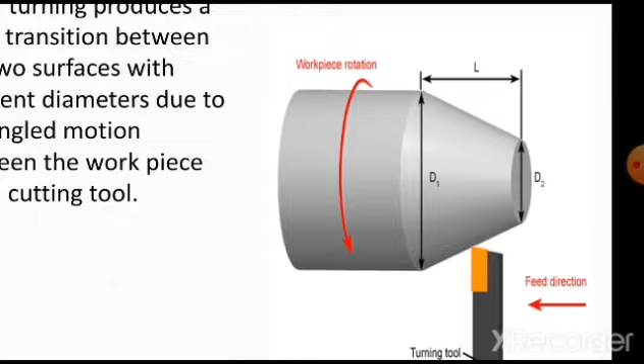So as you are going to see on the screen, let me enlarge it. What is taper turning? First we need to understand it is a part of the turning method only. That means in case of taper turning, we are going to reduce the diameter from larger to smaller, but only to a certain length. That is why it is called a taper.

We are not reducing the entire length. So to clarify here, we have considered a certain length, and we require to consider the diameter d1, the original diameter of the workpiece, and the final diameter of the workpiece. As you can see, the workpiece is rotated and we require to produce a taper, which you are going to see clearly on the screen.

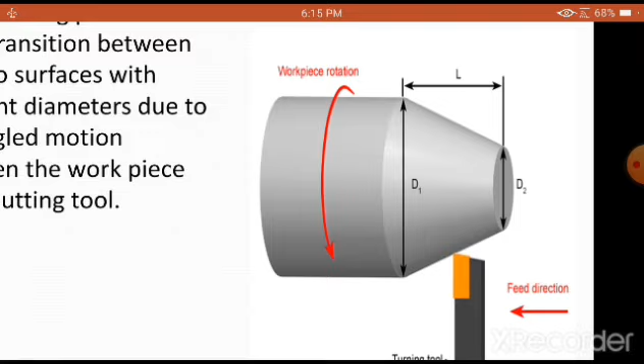So initially it will be like this figure. I require to remove the excess material that is to be removed. This particular method, where we reduce the diameter from larger to smaller either at the end of the workpiece or in the middle of the workpiece, depends on the case. Such an operation we call taper turning.

The feeding of the tool is either done at a calculated angle, or you can have a straight feeding, depending upon the type of turning method which we are discussing one by one.

Taper turning produces a ramp transition. This is called a ramp transition between the two surfaces with different diameters, due to the angled motion between the workpiece and the cutting tool.

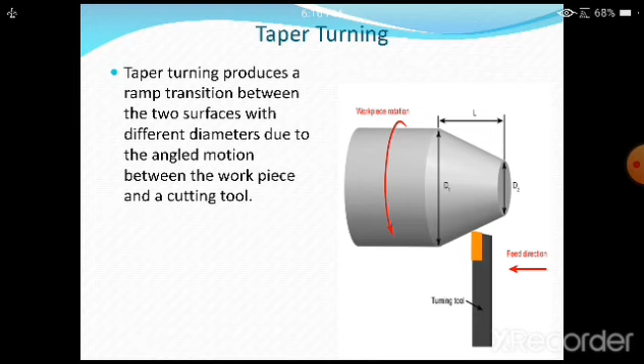As I mentioned, we require to move the cutting tool at a certain angle, or sometimes straight parallel to the axis of the workpiece, depending upon the type of turning method we are going to adopt on a lathe machine. So let us understand tapers and taper turning in detail.

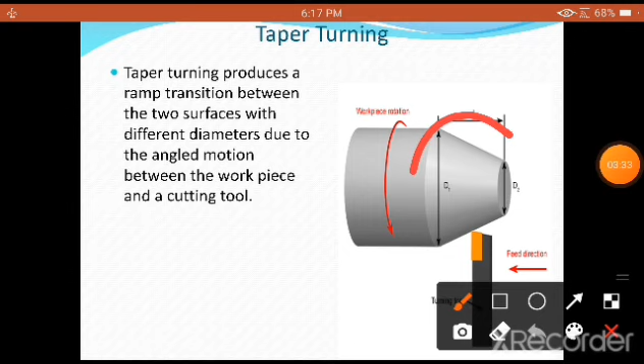In detail, the same taper turning we are going to consider in the form of a taper, as you can observe clearly here. Here you can see this is the original diameter of the workpiece, and this is the final diameter of the workpiece. D1 is the initial diameter, D2 is the final diameter after removing a certain amount of material.

Now here you see the certain taper angle. This is the calculation for the taper angle. We know what is tan of something - opposite side upon adjacent side, that is called the tan of a certain angle, as you already studied with sine theta, cos theta, and tan theta.

Using that formula, this is calculated and written directly here. First I have to calculate d1 minus d2, then divide by 2. So d1 minus d2 divided by 2 - after dividing, I get this portion, d1 minus d2 divided by 2. I wanted to clarify this here.

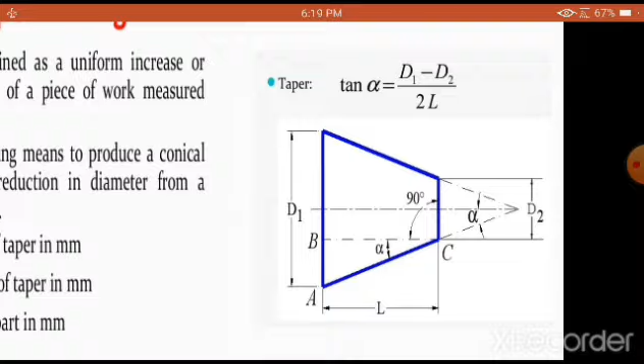Now you need to understand how this taper angle alpha is calculated, because this value is required even in your machine shop when you want to produce a tapered surface on a given workpiece.

A taper may be defined as a uniform increase or decrease in diameter of a workpiece measured along the length. Our measurement is along the length, so as I go either this way or that way, there will be a difference in the diameters. That is why it is called an increase or decrease in diameter, and the surface generated is called a tapered surface.

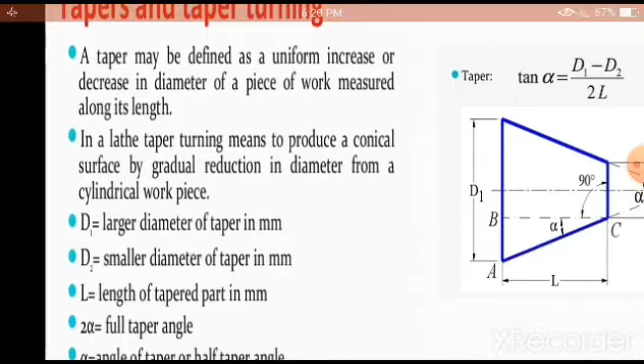In a lathe, taper turning means to produce a conical surface by gradual reduction in diameter from a cylindrical workpiece. That is why we have considered the diameter of the taper d1 as the larger one and d2 as the smaller one.

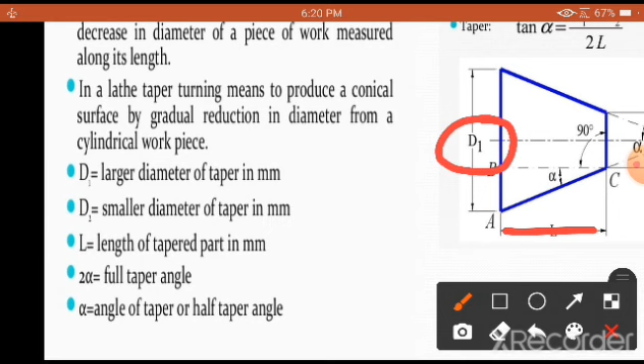Then the length of the taper is also mentioned here, how much length we require to give a tapering operation on a workpiece. 2 alpha is called the full taper angle, and alpha is called the angle of taper, sometimes the half taper angle. So this angle is alpha, this also alpha, this is also alpha, all together it is called 2 alpha, remember.

So that is called the entire taper angle, but we are interested to calculate what is alpha. We have to calculate the value of alpha. So now let us start with the next.

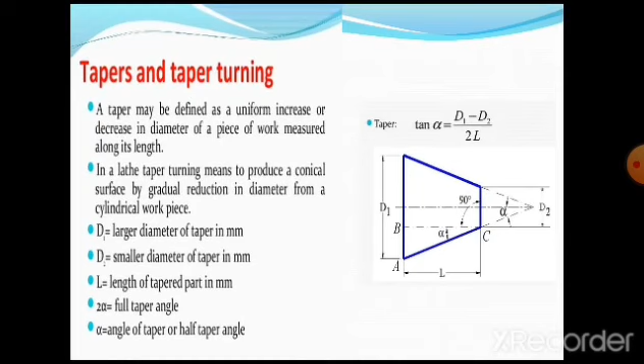The same one we are going to define in the form of conicity. What is this conicity? The amount of taper in a workpiece is usually specified by the ratio of the difference in diameters of the taper to its length. We always take the difference in diameters, because that difference itself is the major consideration to calculate how much reduction of diameter has taken place with respect to length. So we take the larger diameter of taper minus the smaller diameter, divided by the whole length of the taper.

That ratio itself is termed conicity and it is designated by the letter K. So K is nothing but d1 minus d2 divided by L, which you are going to see very clearly there.

Now what are the taper turning methods? We have understood the meaning of a taper first. For a taper we require 3 important parameters: the initial diameter of the workpiece, considered as d1, and the final diameter after reduction, considered as d2. Then how much length of the workpiece is tapered, that is called L. These 3 dimensions are very important for the calculation of the taper as well as the taper angle, and this has to be decided by the operator or the industries wherever they want to go for the tapering operation on a given job or component.

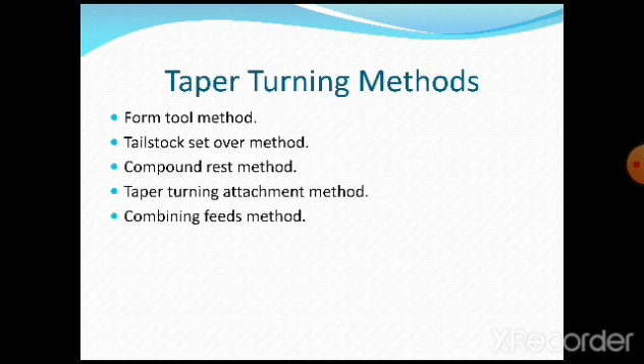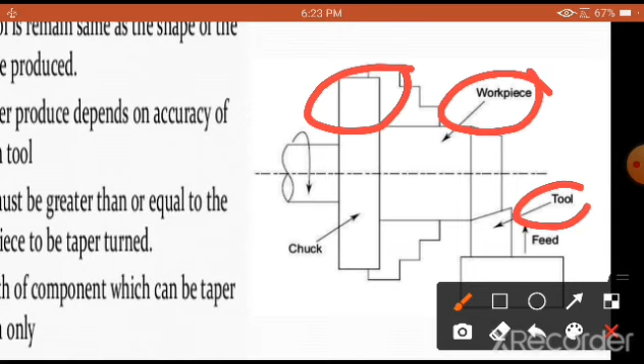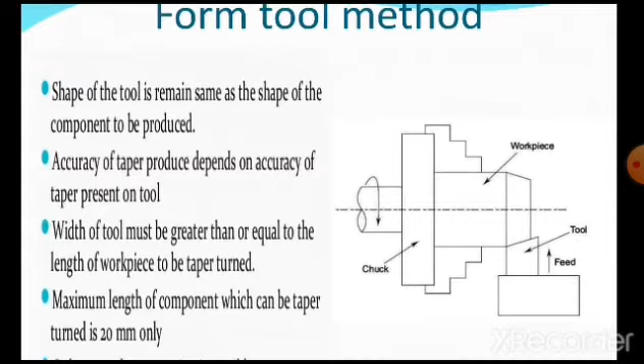Let us start with the form tool method. As you can see on the screen, please view the right side here. I am enlarging it. Here you see the headstock chuck, this chuck, and this is the workpiece. This is the cutting tool, and this is the feed rate. The feeding direction is perpendicular to the axis of the workpiece, this is very important. So why is it called the form tool method? It is called the form tool method because the tool itself already has a certain angle of taper.

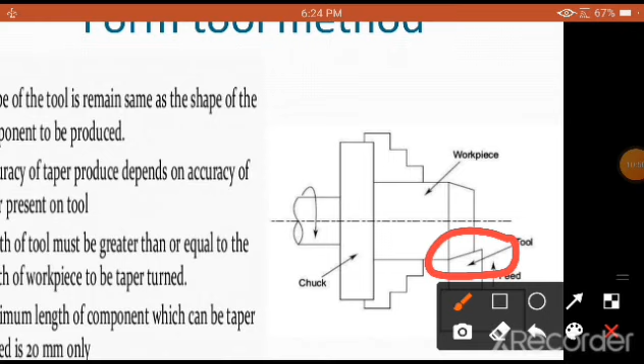Whatever taper angle the cutting tool edge has, the same angle will be produced directly on the workpiece. That is why this particular method is suitable only for shorter tapers, not for bigger tapers. The shape of the tool remains the same as the shape of the component to be produced.

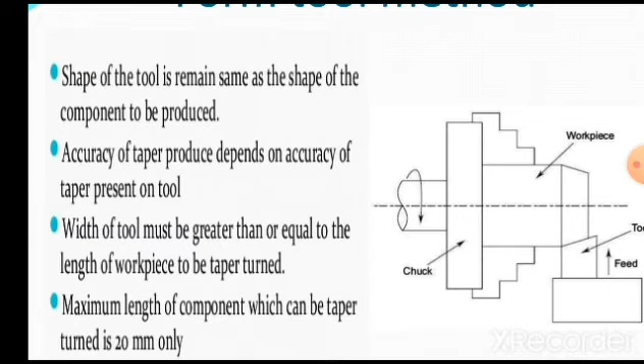Whatever the shape of the cutting edge is, this is called the cutting edge of the tool. Whatever angle you see in this portion of the cutting tool, the same angle is formed as a surface on the workpiece. Whatever taper you see, that taper angle is produced as per the availability of that particular shape of the cutting tool angle itself.

Accuracy of the taper produced depends on the accuracy of the taper present on the tool. How correct the cutting edge is as per the required angle provided on the cutting tool determines whether it is possible to get that particular perfect angle on the surface of the workpiece.

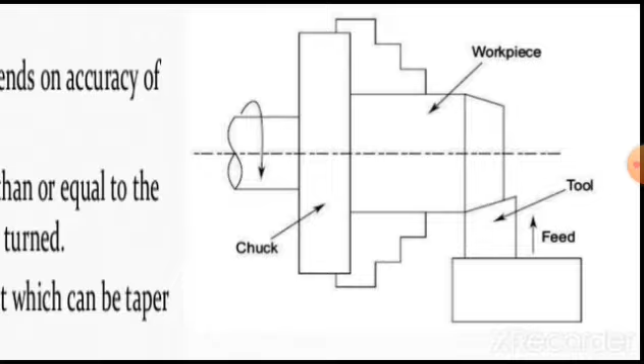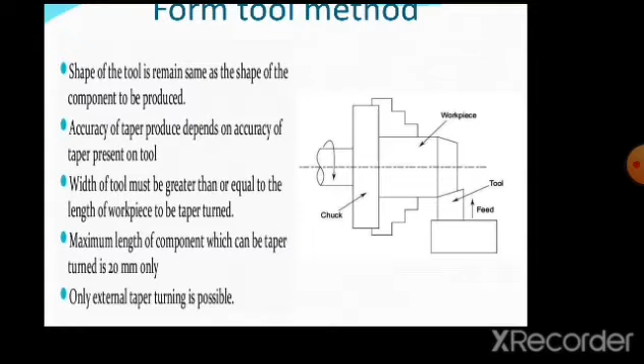Width of the tool must be greater than or equal to the length of the workpiece to be taper turned. This is very, very important. Whatever the width of the tool is, this is the width of the tool you are going to see here. So whatever the width of the tool is, it should be greater than or equal to the taper surface to be produced.

Maximum length of the component which can be taper turned is 20 millimeters. There is a restriction here - we cannot taper more than 20 millimeter width. So again I wanted to clarify this very clearly: this width should not exceed 20 millimeters.

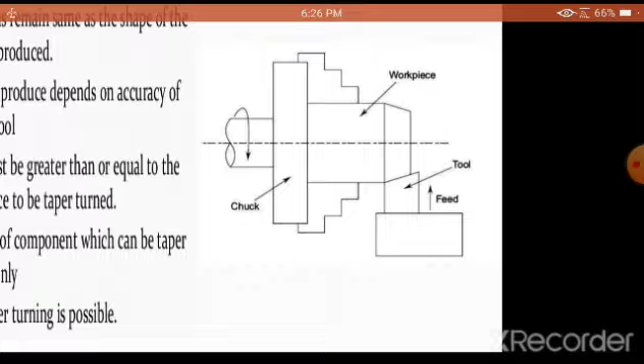If it is more than 20 millimeters, then there will be vibrations, because directly here the cutting tool will be coming in contact with the rotating workpiece, and the feeding is done perpendicular to the axis of rotation of the workpiece. Only external taper turning is possible.

So two things you have to remember perfectly here. One is, in a form tool method, the maximum taper turning width or length possible is only 20 millimeters, or a very small taper length can be achieved by this method. Only external taper turning is possible - we cannot do any internal taper turning here. This is very, very important.

Such questions will be coming as assessment questions. Whatever points I am going to stress on, try to recollect yourself when you want to answer the assessment questions, whenever I tell you in connection with the presentations.

So this is called the form tool method, because whatever angle is formed on the cutting tool or cutting edge, the same form is produced on the workpiece. It is limited to external taper only. Maximum length of taper is 20 millimeters. These are the 3-4 important points which you need to remember.

Now what is the limitation? This method is limited only for short length taper. We cannot go for a larger length, that is beyond 20 millimeters, because the metal is removed by the entire cutting edge, and only increase in the length of the taper will necessitate the use of a wider cutting edge. We require to go on widening the length of the cutting edge, which may produce vibrations, so it is not achievable correctly.

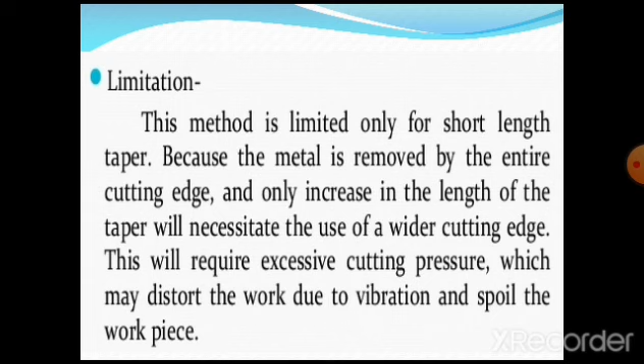Now the next important method we are discussing is the tailstock set over method. First we need to understand there are three important elements here. One is the headstock, located to the left side of the lathe bed. Tailstock is always located at the right side of the lathe bed, and in between the headstock and tailstock we have the carriage. Now we need to understand the meaning of a set over.

Set over means shifting the center of the tailstock. How can we shift it? When we say it is fixed, the tailstock is made to move towards the headstock center, to hold the workpiece between centers depending on its length. One end of the workpiece is always held at the headstock chuck, and on the right hand side the dead center of the tailstock holds it firmly while machining is done. This is the normal method of turning when the workpiece is of moderate length.

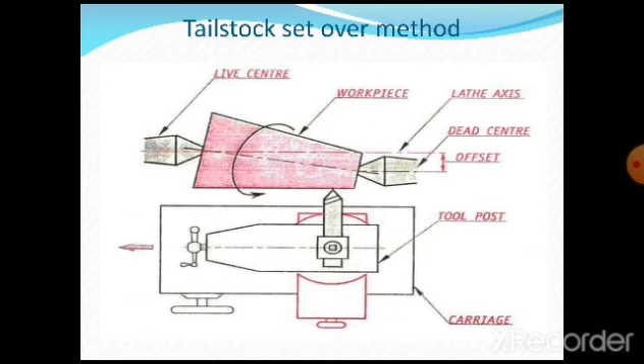But whenever we want to cut a taper by using the set over method, called the tailstock set over method, we look at the top view of the lathe machine. There are two centers here: the live center, located on the headstock, and the dead center. Now let's see what the offset is.

Offset means this: in actual practice, this center should be here, but it is shifted. That shifting is called the offset. Why is this done? This is done in order to shift the axis so that a particular amount of taper can be produced. If this shifting is done, it is possible to produce a certain angle, but there is some limitation for the taper angle.

So you need to understand the workpiece. The lathe axis is shown clearly here, the dead center and offset value, and this is the top view of the lathe bed. This is called the tool post, where the tool is mounted, and the feeding is done in this direction only. As it is fed, due to this offset, a tapering surface is produced on the surface of the workpiece, which we are discussing in detail now.

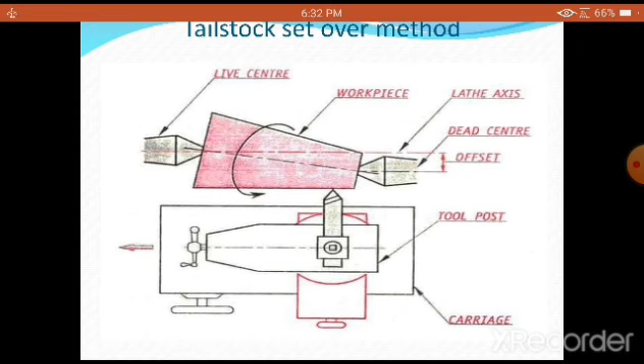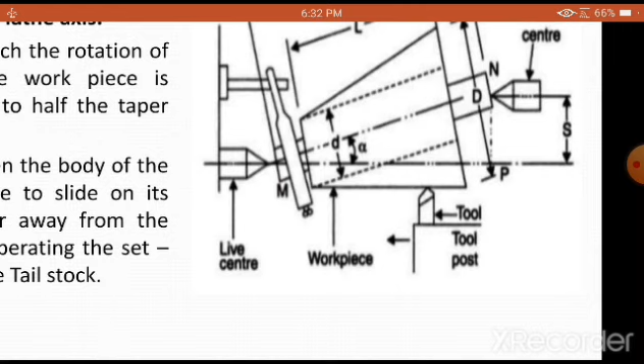It is based on the principle of shifting the axis of rotation of the workpiece at an angle to the axis. I will make it bigger with each sentence so you understand clearly. Now it is shown opposite, but both systems are the same, there is no difference. This is called the set over. This is the live center of the headstock, this is the center of the tailstock, and this amount with respect to the center line is called the set over. Depending on how much set over there is, the tool is fed straight, and it is possible to get the taper angle.

How do you do this? The feeding of the tool is parallel to the axis of the lathe; we are not going to change the feed of the tool, it is done straight. The angle at which the axis of rotation of the workpiece is shifted is equal to half the taper angle alpha. This is very important: whatever angle the axis of the workpiece is shifted by is equal to half the taper angle we require.

As I mentioned, tan alpha equals D minus d upon 2l. The same equation is used, but with respect to S, to calculate the set over value, that is, how much set over is needed.

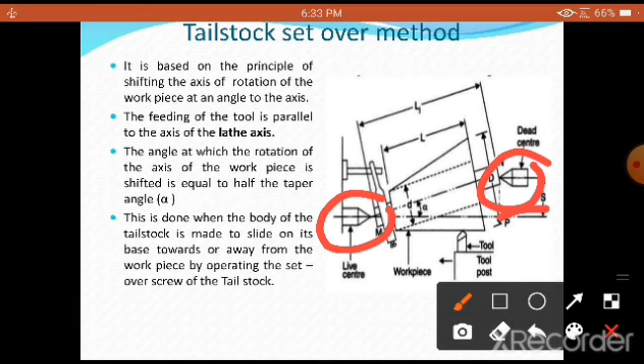This is done when the body of the tailstock is made to slide on its base towards or away from the workpiece by operating the set over screw of the tailstock. Since the headstock center is fixed, but I want to shift from this point to this point, how is this done? It is done by operating the tailstock. The set over screw is at the base of the tailstock, and it is slightly shifted away from the operator, then locked at that position to carry out the taper turning method.

Going into more detail, if taper is turned by offsetting the tailstock, the amount of offset, instead of considering it as S, is here considered as O.

It is also S, both have got same meaning, only the alphabet is different. Offset, word for offset is using O. This offset is nothing but S only, which I have discussed in the previous slide there. Okay.

If taper is turned by offsetting the tailstock, the amount of offset O is calculated as follows. Just observe very keenly here. Again I am going in detail for better understanding now. This is your axis and this is the shifted axis, so that is called as tailstock set over, which you are going to see.

Now to calculate the O value, I have to consider D minus d upon 2. So that will give you this length divided by small l into capital L. So capital L represents the length of the work.

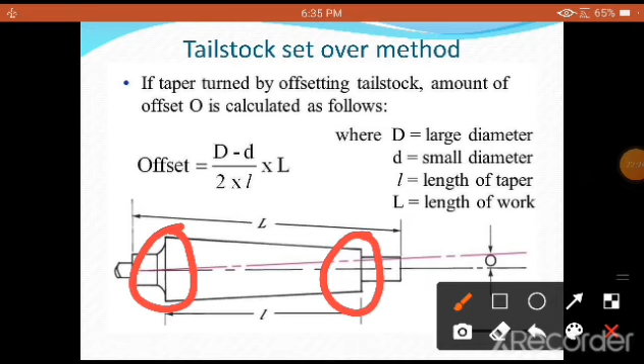On the top, where D is the large diameter. So which is the large diameter here? This is the large diameter D. This is the small diameter d. And this is the length of the taper, and this is the length of the workpiece which is considered. This formula is important whenever we want to solve problems on the tailstock set over method.

So the next type of method coming is the compound rest method. In a compound rest method, there are various parts on a carriage, as you are going to see. First of all, we require to understand on a carriage as it is, we have got a compound rest slide. Then after that, you'll be having the tool post being mounted one above the other.

First we are going to have a saddle, above that the compound rest, then above that you'll be having a tool post like this. Now whenever we want to understand how to carry out the taper turning operation using the compound rest method, we require to tilt the compound rest device with respect to a base, a graduated base, which we are discussing in detail now.

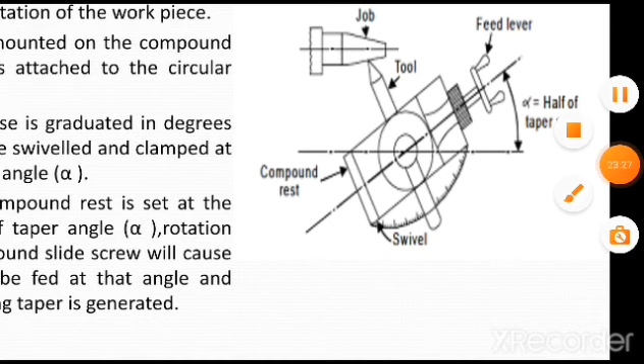Try to understand here very clearly. Now I made it slightly larger. So now this is the axis of the lathe, simple thing, and just we have shown here, this is the lathe axis, okay, and this is the movement of the carriage, through which it is made to move in either direction.

I just clarify once again, no confusion, this is the axis of the workpiece, and this is the movement of the carriage which is made to move in either directions. So now what is going to happen at the beginning?

This compound rest is a straight one, it will be like this. That means this axis, whatever the axis angle which you are going to see, this which I have drawn, will be at the beginning like this. Remember, at the beginning it will be like this, and after that it is tilted to an angle which is calculated.

How much taper we want, we have to decide. Calculate the angle alpha and turn this compound rest with respect to the graduated base in degrees. How much angle? It may be 10 degrees, 20 degrees, 25 degrees. That much degrees this compound rest slide is tilted to the required angle with respect to this graduated base, then it is fixed.

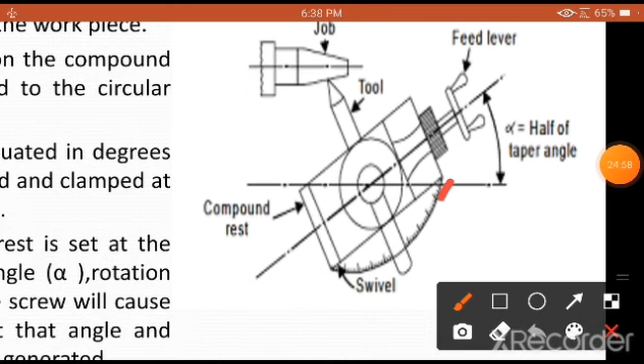Then the feeding of the tool is done as it is with the help of this feed lever, which you are going to see there. So let me again read it for better understanding. Workpiece is rotated on the lathe axis and the tool is fed at an angle alpha to the axis of rotation of the workpiece.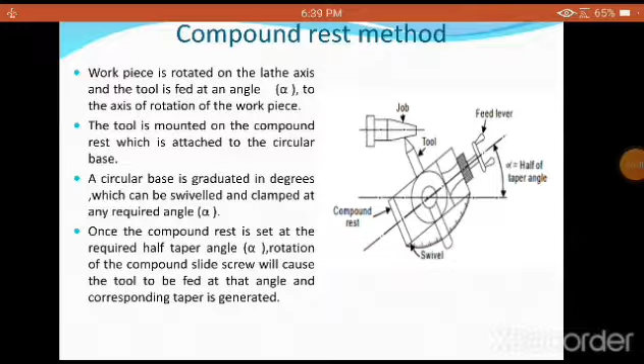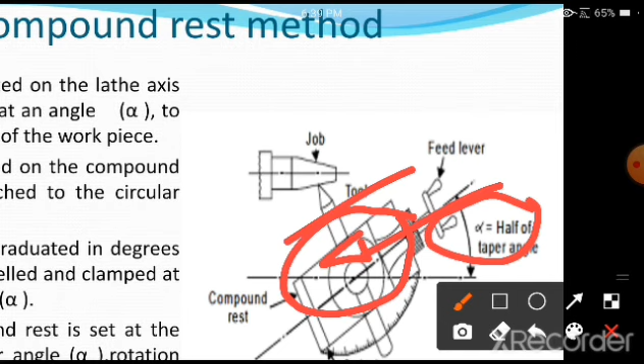First of all, it is fed at an angle alpha, because the angle alpha is given, the angle alpha is calculated at the beginning only. How much angle alpha is calculated, and this entire compound rest is tilted to this angle, then the feeding is done at an angle only by the cutting tool. The feeding is done in this way only to produce the taper. That is the method here which you need to understand.

The tool is mounted on the compound rest, which is attached to the circular base, which I have just told. A circular base is graduated in degrees, which can be swiveled and clamped at any required angle alpha.

It can be tilted and rotated to the required degrees, and it can be fixed, and the feeding of the tool can be done.

Once the compound rest is set at the required angle, half the taper angle alpha, you have to calculate first using the formula: D minus d upon 2L. Then rotation of the compound slide screw will cause the tool to be fed at the angle and the corresponding taper is generated. So as you are going to see, once this angle is set, the feeding of the tool is done like this to provide a taper of the required length on a workpiece.

So this method is called the compound rest method. This compound rest method is more beneficial compared to the tailstock set-over and form tool method, because here we can go for larger angles, but the only thing is we need to consider small length workpieces. We cannot carry this out for a very large length of workpiece.

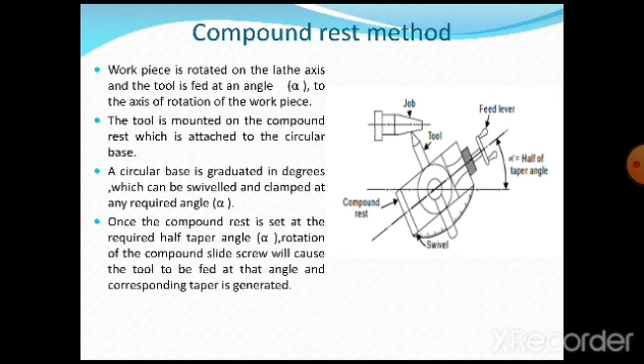Now the next one, very important, is called the taper turning attachment. As you can see from the word, taper turning attachment, it is a separate attachment. It is provided exactly opposite to the carriage, meaning on the other side of the bed, which you are going to see. Now I will make it very clear, as you are going to see on the screen here. I have brought it.

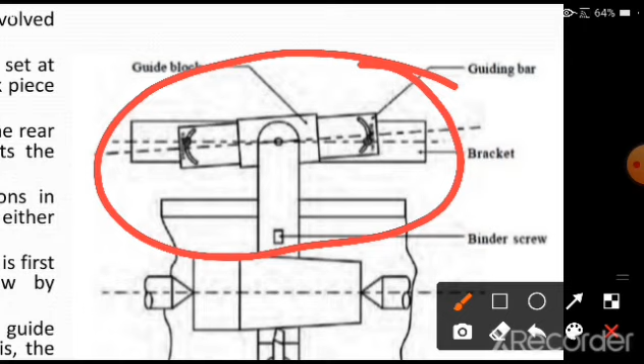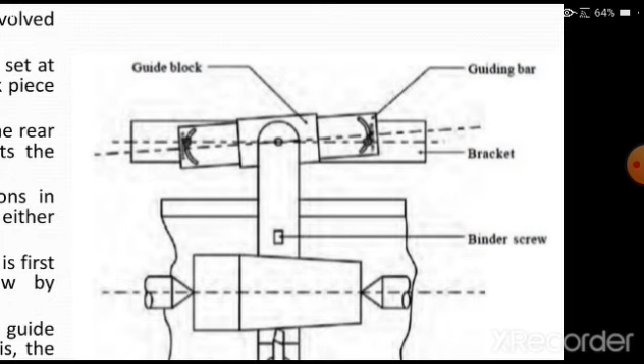So now what you are going to see here, this entire portion, is nothing but a separate attachment which is provided, and it is known as the taper turning attachment. It has a guide block, a guiding bar, and a bracket. This bracket is directly clamped and fixed on the other side of the lathe bed. These are the lathe bed axis which you are going to see here.

So this again, whatever you see, is the top view only. Now this is the lathe bed guideways. On this, two centers are there as usual: you have the headstock center and the tailstock center. Then you will have a compound rest with a cutting tool seen there for the cutting operation.

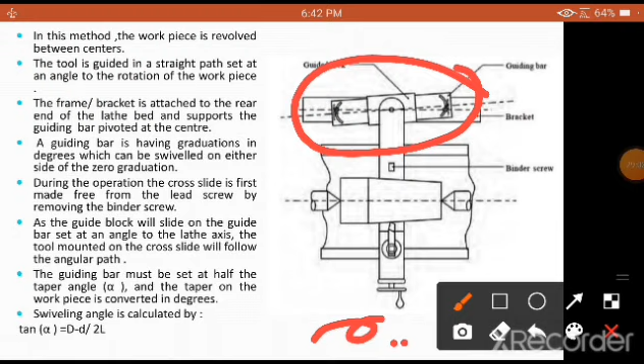So this entire portion, all these things, is attached directly on the other side, because the operator is standing here. The person operating will be in this portion. On the other side, the attachment is being fixed or provided to carry out the process of turning.

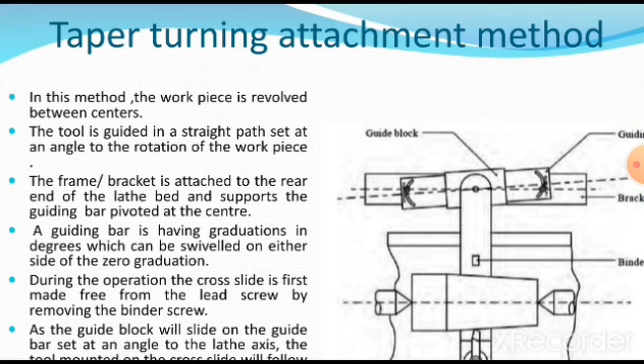So how is this done? In this method, the workpiece is revolved between the centers. What is the first condition? The workpiece has to be revolved between the centers. The tool is guided in a straight path set at an angle to the rotation of the workpiece. The tool feeding is done straight.

We are not going to... that means exactly what? Straight path. The frame or the bracket is attached to the rear end of the lathe bed and supports the guiding bar pivoted at the center. So again, I will make it larger here. This bracket is there which you are going to see here.

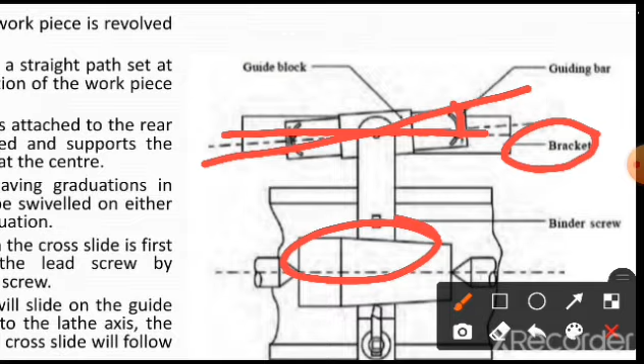This bracket is a straight one. This guiding bar is slightly tilted. At the beginning the guiding bar is straight, then afterwards some tilting is done. So how much angle of this tilting is done, according to that I am going to get a tapered angle here. That is what he is explaining now.

The frame or the bracket is attached to the rear end of the lathe bed and supports the guiding bar pivoted at the center. A guiding bar has graduations in degrees which can be swiveled on either side of the zero graduation. That means it can be tilted one way or the other way.

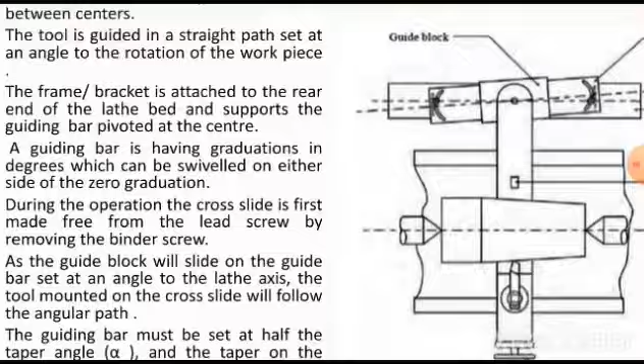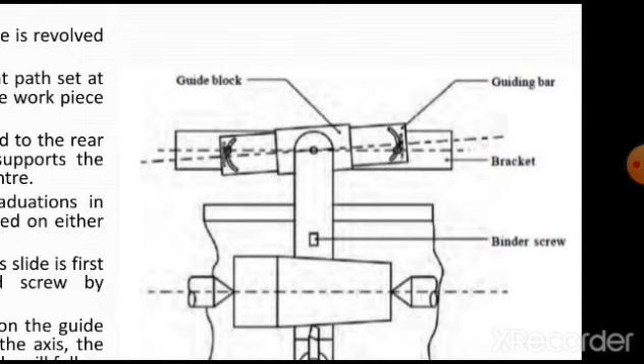So what is the meaning of that? I will explain once again. Here you see three important elements: one is the bracket which is fixed, one is the guiding bar, and another is the guide block, on which there is a clamping of this surface. Now, according to whatever angle I calculate, the bracket will start guiding the guiding bar. That is very, very important. A guiding bar has graduations in degrees which can be swiveled on either side of the zero graduation.

During the operation, the cross slide is first made free from the lead screw by removing the binder screw. One binder screw is attached directly to the lead screw, and it has to be removed so that it can move freely.

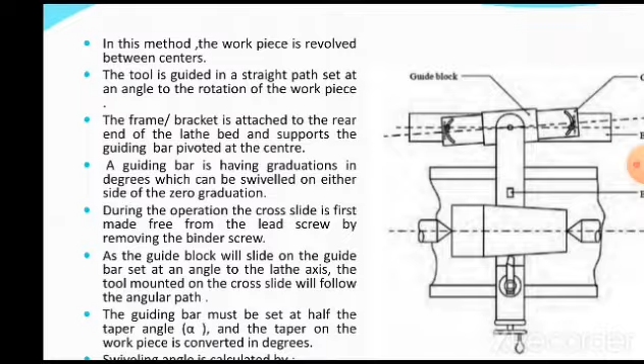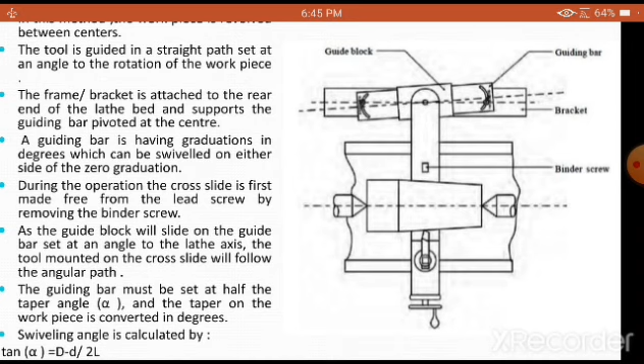As the guide block slides on the guide bar set at an angle, this bar will start sliding along the guide bar. So when the guide block slides on the guide bar set at an angle to the lathe axis, the tool mounted on the cross slide will follow the angular path.

The guiding bar must be set at half the taper angle, and the taper on the workpiece is converted in degrees. Taper means tan alpha, according to the slope. The swiveling angle is calculated by the formula tan alpha equals D minus d upon 2 into L, where length L is the length of the taper being produced.

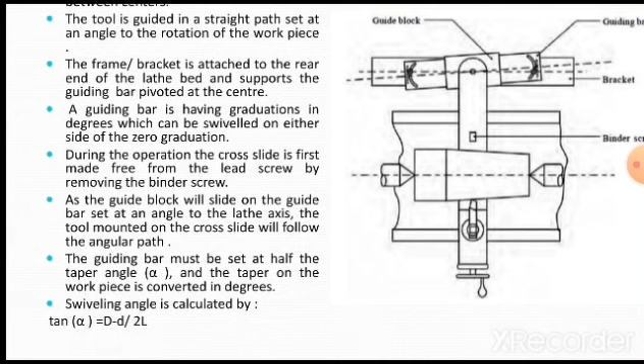Using this it is possible to calculate the value, once you decide the initial and final diameter, whether reducing from 30 millimeters to 25 or to 15 millimeters. 30 millimeters is the larger diameter, 15 millimeter is the smaller diameter: 30 minus 15 divided by 2 into L. The length of the taper, say about 15, 25, or 30 millimeters, you have to decide. Then calculate tan alpha, find the value of alpha, and set the guide bar to that angle.

Now what are the advantages of using the taper turning attachment? The alignment of the live and dead centers being not disturbed, both straight and taper turning may be performed on a workpiece in one setting without much loss of time. The workpiece is held between the two centers, headstock and tailstock, so there is no much disturbance, and both straight and taper turning may be performed in one setting only.

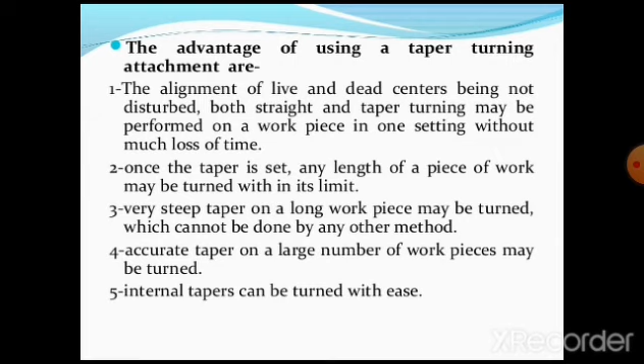Once the taper is set, any length of workpiece may be turned within its limit, whatever the limitation of angle of taper allows. Very steep, meaning very deep, taper on a long workpiece may be turned, which cannot be done by any other method. Accurate taper on a large number of workpieces may be turned, because we use a very rigid attachment known as the taper turning attachment. Internal tapers can also be turned with ease using certain attachments.

Now the last method we are going to discuss is taper turning by combining feeds. Generally only one type of feed is used, called the longitudinal feed, and another term we use is depth of cut. We will discuss these in detail in subsequent presentations.

Taper turning by combining feeds means we combine two types of feeds. At a time we decide how much lengthwise feed is given to the cutting tool and how much is given perpendicular to the axis, or perpendicular to the longitudinal feed. By combining those values of feeds, it is possible to give a certain amount of taper on a workpiece.

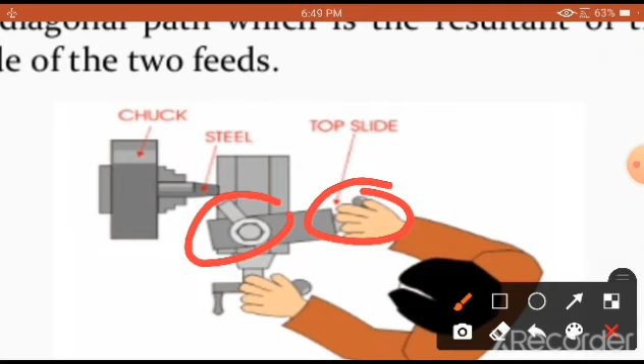Okay, top slide, and at the same time he is also tilting the workpiece. That means he requires to give straight as well as like this, so some resultant has to come.

That is considered as the angle of a taper while the operation is being carried out. So this method is also not common like the first one, the form tool method, but the remaining ones like tailstock set over, compound rest method, and taper turning attachment are the most commonly used types of taper turning methods.

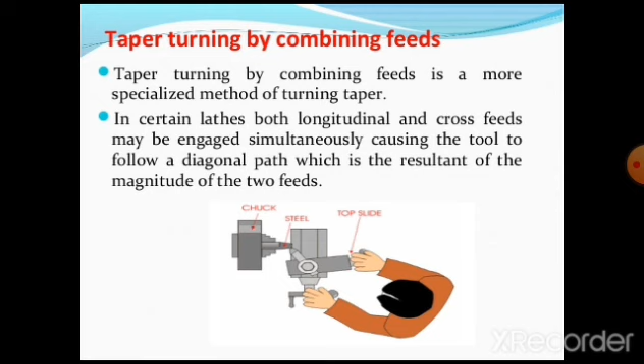Now in connection with the frequently asked questions which you need to study, and you require to write the answers for all these questions, taking into consideration whatever sketches are put in the presentations, you can download and draw the same sketch and keep it ready as notes for reference.

Explain any two taper turning methods with sketch. Either you can explain the form tool method, taper turning attachment, or compound rest method, whatever is there. For the sketch, only draw the taper turning attachment sketch.

Write the different methods of taper turning which have already been discussed now in detail. Explain taper turning by tailstock set over method by using a suitable sketch.

This is a very important question. By using the tailstock set over method, how are you going to carry out the process of machining or providing tapers on a given workpiece? That is why you require to study these very important questions expected to come in the examinations.

Along with this presentation, I am also going to attach one or two simple videos for better understanding of how these attachments are going to work, by using those attachments, how practically there is generation of tapers on a given workpiece. Everybody compulsorily has to attend the assessment questions.

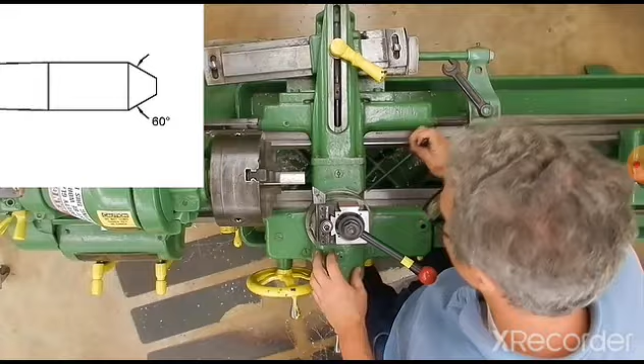So there's a couple of ways of turning tapers. We'll start by turning a little short taper, a 60-degree included angle, and we'll use the compound rest for this one.

Loosen these two set screws on the compound rest. That will let us swivel it around. So for a 60-degree included angle, that means we're going to need to set the compound rest to 30 degrees.

I could swing it around here to the left like this. I'll just go ahead and set it up this way, and then I'll show you why I don't want to do this.

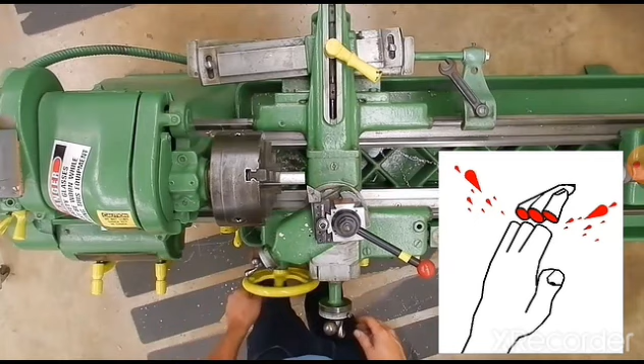It's not really that big a deal, it's not that close, but I don't like the idea of my hand being that close to a pinch point. So I'm going to swing this around the other direction, just to show you that you do have some options when you set these up.

In fact, sometimes I'll run the spindle in reverse and cut on the back side of the part. But this works well enough for what I've got. It's pretty straightforward - tighten these set screws back down.

And you want to adjust your tool so that you get a lead angle that's appropriate for the taper being cut. I like to kind of match it front and back so that it's approximately the same, going left and going right.

You'll see we have to use the manual feed on the compound rest. This is one of the big disadvantages - of course the other one is you just don't get that much distance out of it. But it does fine for short tapers that are not too critical with the surface finish.

But if you try to control that nice, good, consistent feed - I'm going a little bit faster here, just roughing it off. But with a little bit of practice, you can get pretty consistent machine marks.

All right, the other way we can make tapers, if you have one on your lathe, is with a taper attachment.

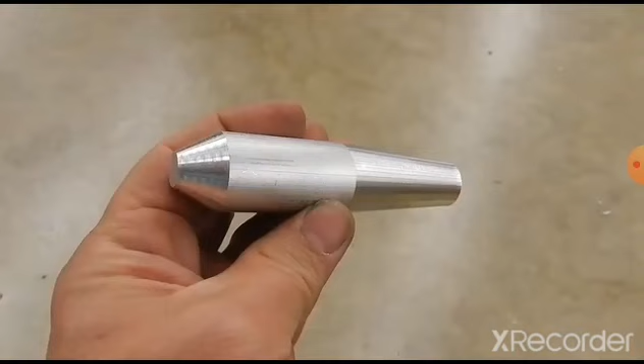The apron moves parallel to the bed to cut the workpiece.

If the tailstock centre is moved forward, more material will be taken off the tailstock end of the workpiece. The tailstock is moved off its centre by first loosening the front hex-headed screw to allow some movement, then tightening the rear screw to pull the top of the tailstock forward.

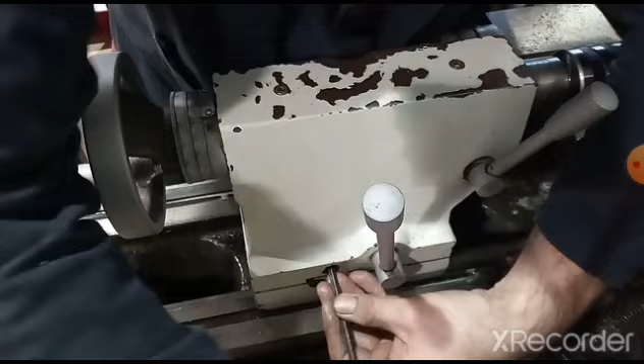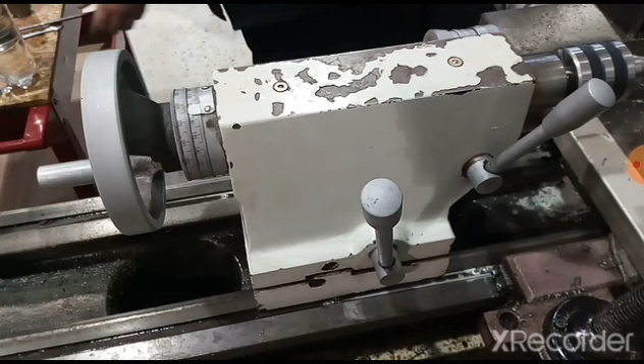The angle could be measured using a bevel protractor or by measuring between two known points with a dial indicator. I have marked two points 100mm apart to demonstrate. It could be more accurately done using the digital readout. I am setting it to half a degree, 30 minutes, on the sine table. 0.0087 times 100mm equals 0.87mm.

Tighten up both screws to make sure the tailstock is secure, and recheck the position. A final check to make sure everything is secure, then remove the clock. Move to the start position and start cutting.

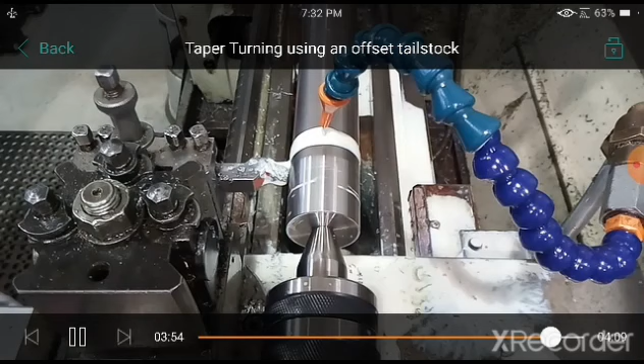Coolant to protect the tool and improve the finish. The auto feed can be used with this method. That is a taper turned using the offset tailstock method.

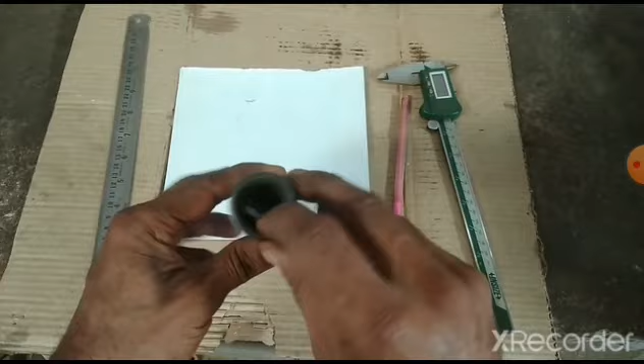सबसे पहले हमें इसकी डिग्री, छोटा डायमीटर, बड़ा डायमीटर और लंबाई का माप करना पड़ेगा। तो हम पहले डिग्री देखते हैं। इसकी डिग्री हमेशा 1.5 डिग्री होती है।

सॉकेट की जो डिग्री है वो 1.5 डिग्री होती है। अब हम इसका बड़े वाला डायमीटर नाप लेते हैं। ये आ रहा है 32.40, राउंड फिगर में 32.4। इसका बड़ा डायमीटर आ रहा है 32.40।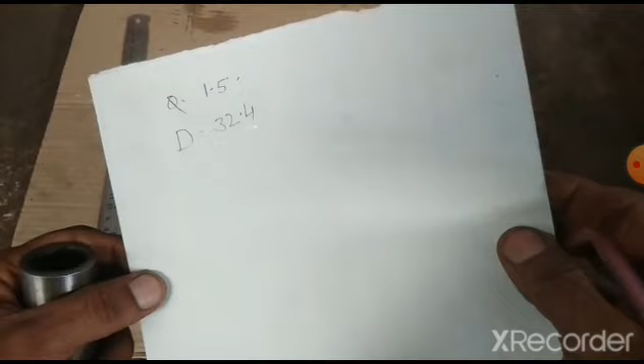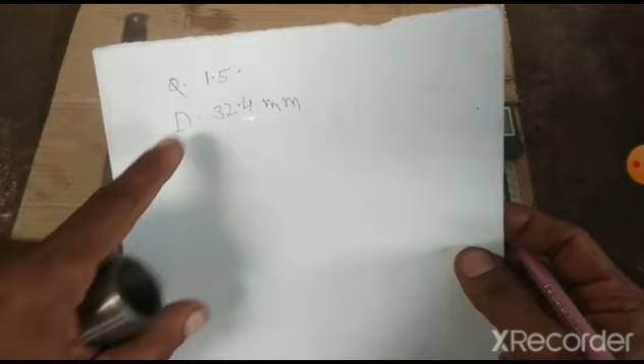अब हम इसका छोटे वाला डायमीटर का माप लेंगे। बड़ा डायमीटर 32.40 mm है। अब इसके छोटे वाले डायमीटर का माप लेते हैं। ये आ रहा है 26.40, राउंड फिगर में 26.40।

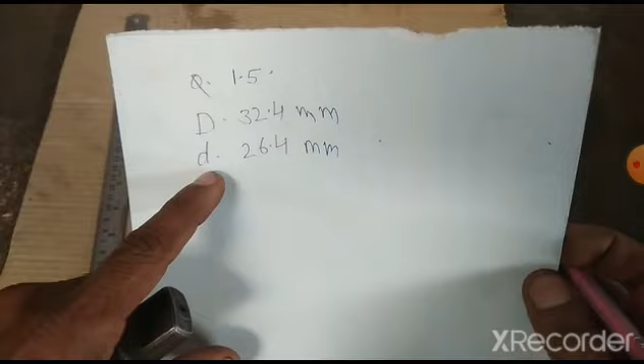ठीक है, ये छोटा वाला डायमीटर हम लिख देते हैं। कैपिटल डी बड़ा डायमीटर, स्मॉल डी छोटा डायमीटर। 26.40 mm, ये स्मॉल डी है। अब हम इसकी लंबाई देख लेते हैं।

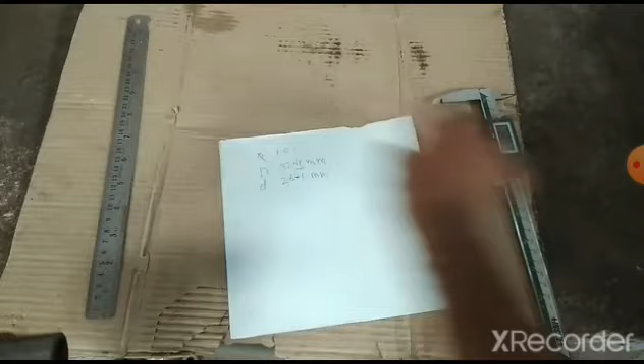इसकी जो लंबाई है वो मैं नाप लेते हैं यहाँ। ये इसकी लंबाई 114.50 के करीब आ रही है। राउंड फिगर में हम लेंगे 114.50 mm लंबाई।

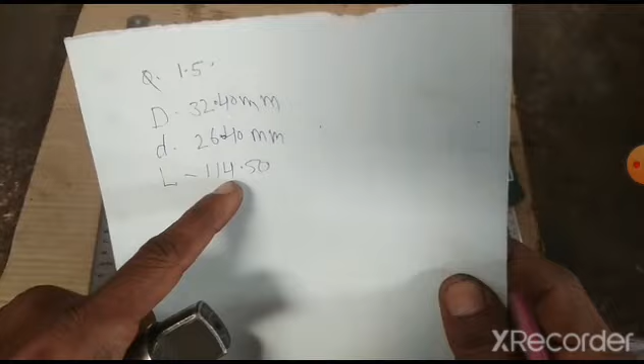ये डिग्री 1.5 डिग्री है। बड़ा डायमीटर 32.40, छोटा डायमीटर 26.40, लंबाई 114.50। ठीक है, तो ये हमने मेज़र कर लिया है।

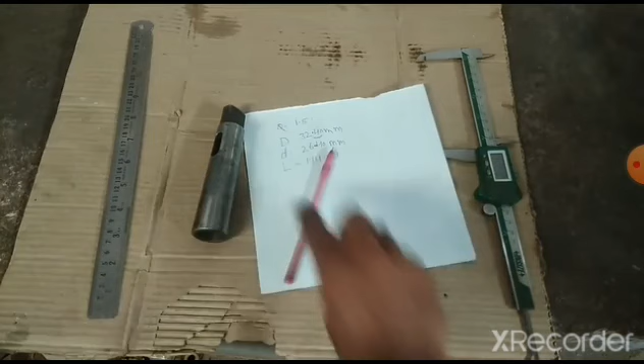अब हम गूगल प्ले स्टोर में चलते हैं और उस एप्लीकेशन को डाउनलोड करके चेक करते हैं कि ये हमारी डिग्री सही बताता है या नहीं। तो दोस्तों, सबसे पहले हमें प्ले स्टोर ओपन करना होगा।

और सर्च में लिखना होगा टेपर एंड ट्रायंगल डिग्री कैलकुलेटर। ये जो सबसे ऊपर आ रहा है, हमें ये इंस्टॉल करना है। ये मैंने पहले से इंस्टॉल कर रखा है, इसलिए ये सीधा ओपन हो जाएगा। तो मैं इसको ओपन कर लेता हूँ।

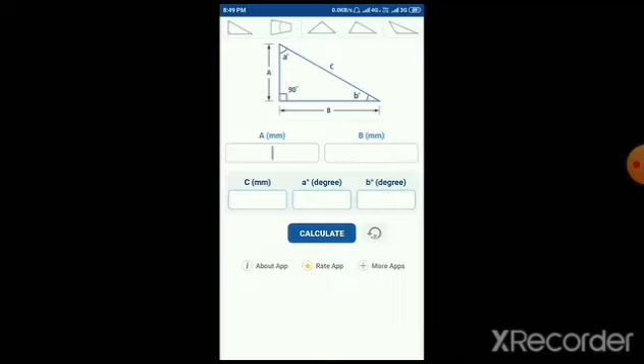हमारे पास बड़ा डायमीटर पता है 32.40। 32.4 करो या 40 करो, कोई फर्क नहीं पड़ता, बराबर ही है। छोटा वाला डायमीटर है 26.40, और जो लंबाई है वो है 114.50।

बड़ा डायमीटर, छोटा डायमीटर और लंबाई हमने यहाँ फिल कर दी है। जैसे हम कैलकुलेशन पर क्लिक करेंगे तो हमारे पास 3 आंसर आएंगे - ए डिग्री, बी डिग्री और टी डिग्री। ए डिग्री जो कोने में लिखा हुआ है, वो जो एंगल आएगा वो ए डिग्री में आएगा।

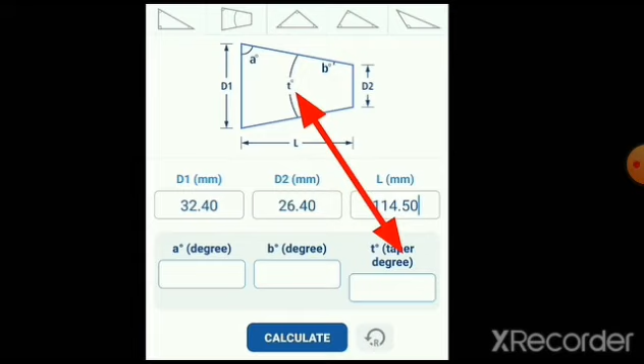बी डिग्री में आएगा अपने लेथ मशीन वाली डिग्री, जो हम कंपाउंड रेस्ट से निकालेंगे। टी डिग्री में आएगा ये टोटल डिग्री। तो हम कैलकुलेट पर क्लिक करते हैं, तो क्लिक करने के बाद हमें ये 3 आंसर मिल गए हैं।

ए डिग्री, ये जो कोने वाली डिग्री है, ये 88.5 डिग्री है। बी डिग्री जो हमारे कंपाउंड रेस्ट से निकालेंगे, वो डिग्री जो हमारे जॉब पे होगी, वो यहाँ बी डिग्री में आएगी। तो ये जो अभी सॉकेट की डिग्री थी वो और ये डिग्री बिल्कुल मैच कर रही है। इसका मतलब है कि ये एप्लीकेशन बिल्कुल ठीक काम कर रही है।

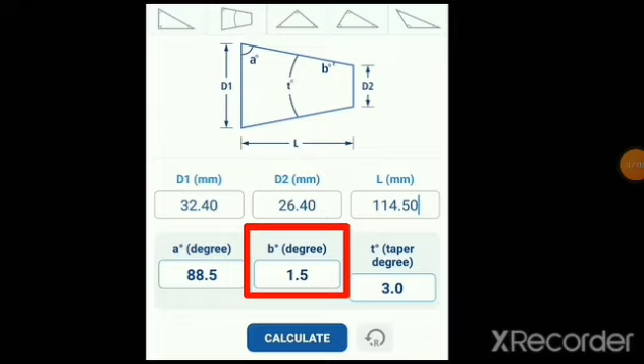ये मैंने इसलिए बताया है, वो सॉकेट का जो मैंने नाप लेके बताया, वो इसीलिए बताया ताकि ये पता चल सके कि हाँ वाकई ये एप्लीकेशन अपने काम की है। यहाँ पर ये बी डिग्री बता रहा है 1.5 डिग्री, ये हमारे कंपाउंड रेस्ट से हम 1.5 डिग्री करके निकालेंगे तो वो सॉकेट की बराबर 1.5 डिग्री आ जाएगी।

और ये जो 3 डिग्री आ रहा है, ये दोनों तरफ की डिग्री आ रही है। ये जो टी है, टोटल डिग्री टी, ये टोटल डिग्री आ रही है 3 डिग्री। तो अपने तो ये बीच वाला काम आएगा बी डिग्री। बी डिग्री 1.5 है, ये हमारे काम का है।

ये दोनों हमारे कंपाउंड रेस्ट में काम नहीं आएंगी। ऊपर और भी बस 2-4 ऑप्शन और दिए हुए हैं। ये जो शीट का काम करते हैं, चादर का काम करते हैं, उनके काम के हैं।